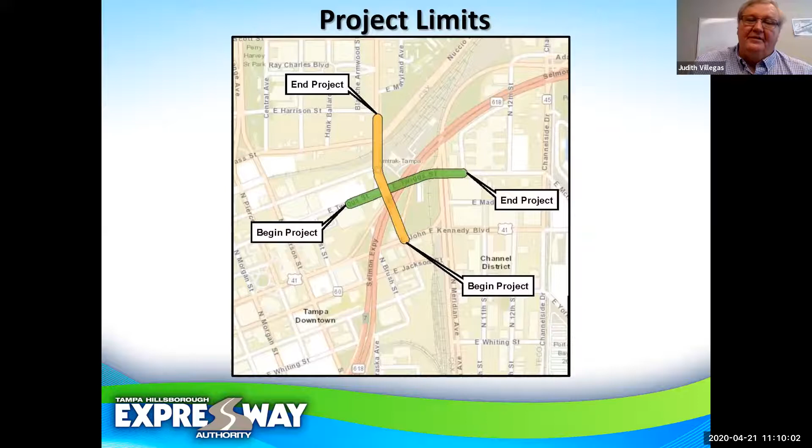The goals of this project: the city of Tampa did a study in this area because of some of the traffic operational and safety problems. So we're looking to improve the safety and the operational efficiency within this corridor. We want to minimize the inconvenience to the traveling public.

The major part of this project is adding an additional lane on Twiggs in the westbound direction, so we'll have a third westbound lane. This is going to improve the traffic flow. We want to make sure that we minimize the number of traffic control plan phases. We have a couple of major facilities adjacent to the projects, which we'll talk about later. We need to maintain direct access to all the adjacent properties at all times.

We need to coordinate with any adjacent construction projects or maintaining agencies. We've got the city, the DOT, and CSX that will come into play. And we want to make sure we minimize the inconvenience to the adjacent railroad station on the north side of Twiggs and the charter school on the south side of Twiggs.

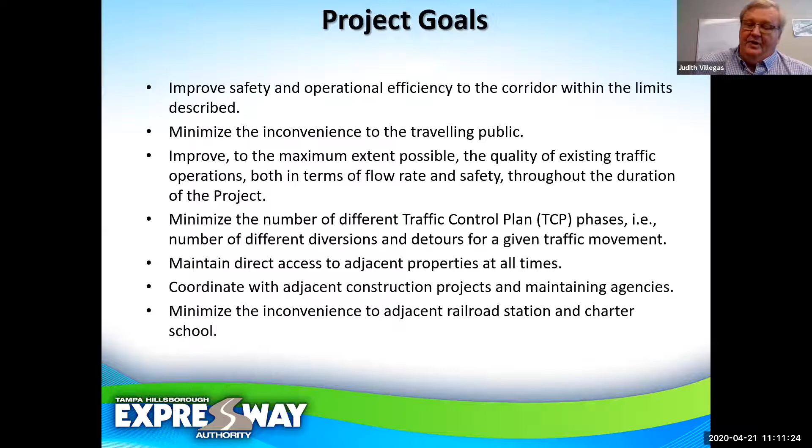Here's a look at the project, the roadway plans. As you can see, the roadway construction aspects are from Nebraska east. We'll be widening to the north side of the road. We'll have to do some adjustments to some drainage inlets to tie into the existing storm sewer system.

You'll see that we'll make adjustments tying into the two driveways located there on the east end of this sheet. Also, you'll notice right at the east end of this sheet that we're closing off one of the driveways into Union Station.

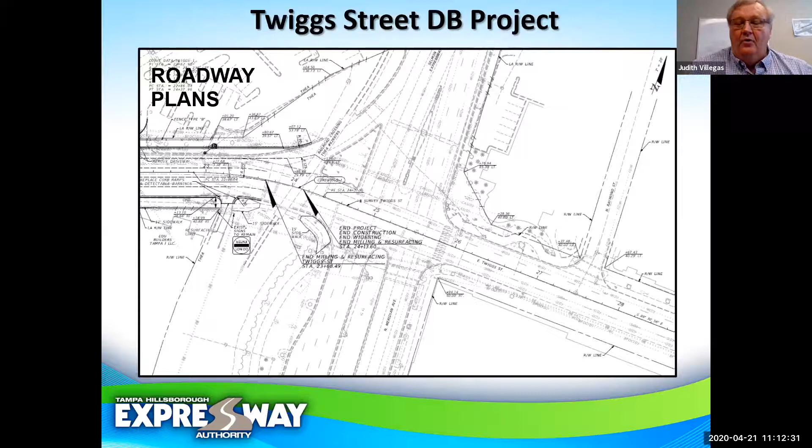You'll see on this next sheet the actions we're taking so that will improve the traffic operation along Twiggs. As you can see, we're stopping the curb work and sidewalk work before we get to the railroad tracks. I want to point out one important item: in working with the City of Tampa, we made some adjustments to where the sidewalks will be located, so they're not all adjacent to the curb as in normal situations.

On the north side, we'll be constructing a 15-foot sidewalk that will tie into Union Station. We will not continue a sidewalk along the north side of the road, as there is no pedestrian crossing at Meridian, because that's the end of our reversible express lanes. We want to direct all pedestrians to the south side of Twiggs to cross Meridian there, where we have crosswalk signals, etc. On the south side of Twiggs, the sidewalk will actually be off the curb and behind the bridge piers from Nebraska east to the westerly entrance to the school.

Then it will transition, and that area is within THEA right-of-way. It will transition up to adjacent to the back of curb in front of the school, but still a wider sidewalk all the way, with no grass strip—sidewalk from the back of curb to just inside the right-of-way line. That wider sidewalk will then tie into the existing sidewalks on each side of the railroad tracks.

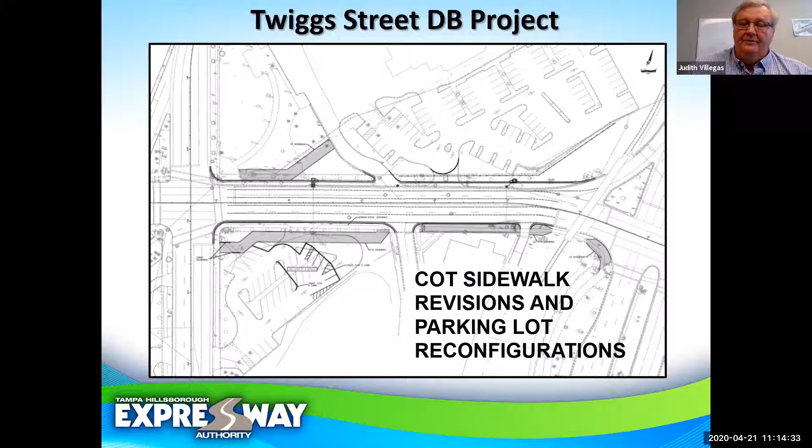For our traffic control plans, there will be no lane closures allowed along Twiggs between 6 and 9 a.m., and also between 2 and 7 p.m. Those longer afternoon hours are due to the school letting out. This applies Monday through Friday. On weekends, longer closure hours will be allowed, and we'll work with the contractor, potentially on non-school days, to adjust that afternoon closure to allow more work hours.

Any work at night, we need to make sure we minimize noise impacts because we do have residents to the east of the project along Meridian. As I mentioned earlier, there's coordination needed with the school and Union Station.

Public involvement for TCP—the design build team will need to constantly be providing information to THEA's communications team so they can get information out to the public on THEA's website for any lane closures or other major work efforts.

A major item as part of this project is we have a joint project agreement between THEA and the Florida Department of Transportation. Part of the project is also putting in new signals at Nebraska and Twiggs. The DOT is funding that as a project they had, and THEA is constructing it as part of this project. Part of that joint project agreement between THEA and DOT is you will need to have a DOT railroad clearance letter prior to beginning construction.

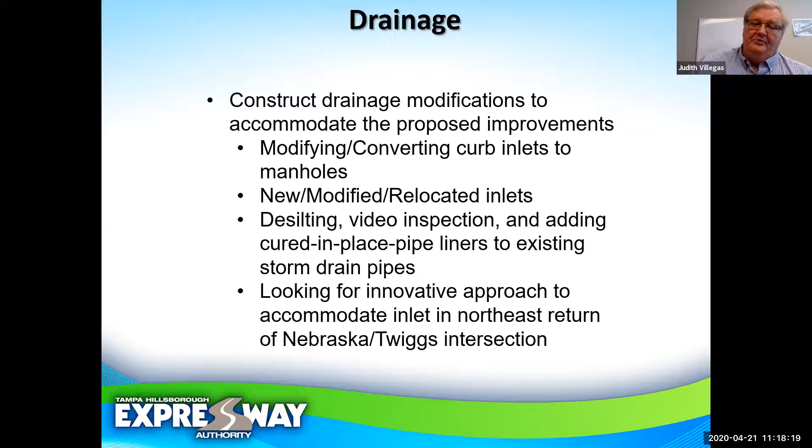As mentioned, we're replacing the existing signals on span wires with mast arm supports. We have a conceptual roadway design as part of the RFP package, along with a conceptual signalization design with mast arm locations in the northeast and southwest corners of the intersection. We've already done utility clearance and SUE work in those locations to avoid conflicts with those mast arms. We also obtained an approved design variation for diagonal mast arms on the project, which has already been signed off by DOT.

Included with the signals is updating the pedestrian signals, and there are a lot of ITS communications for the signals with the City of Tampa and other agencies. All that work will be included within the project.

Sign structures and lighting. Part of the study by the city recommended constructing overhead signs to restrict westbound Twiggs Street traffic from turning left onto Nebraska between 7 a.m. and 9 a.m. This will allow more east-west flow along Twiggs. Overhead signs will need to be placed, and we're looking for the design build team to come up with a design for where to locate and construct the proper signage to restrict the left turns at that intersection.

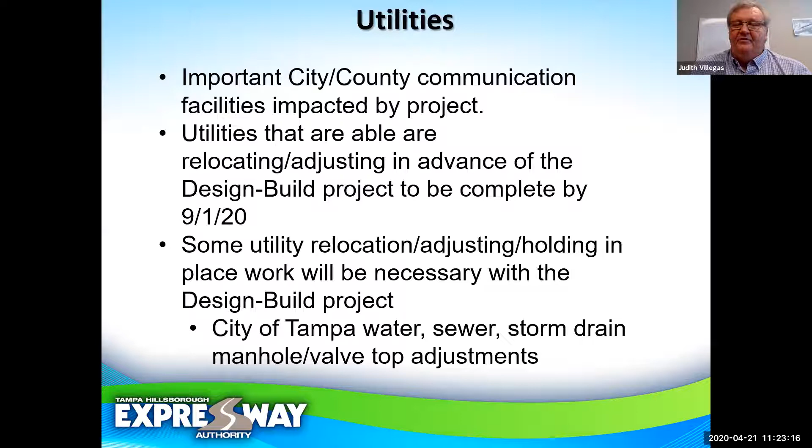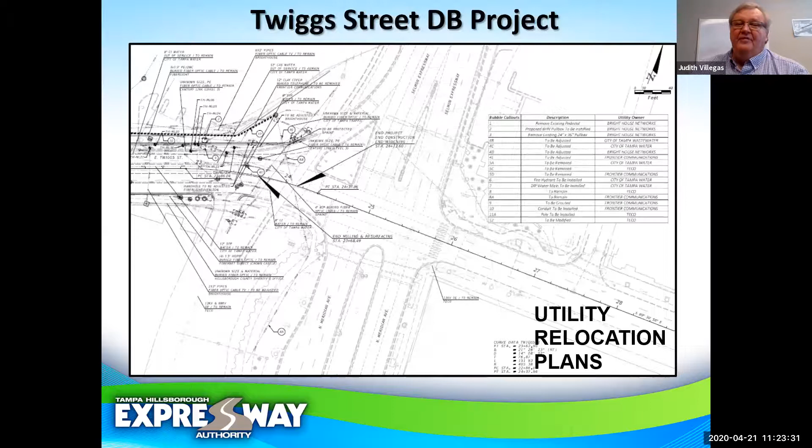We prepared utility relocation plans. These will be provided to you, showing all the SUE work and locates we've done, and that information will be provided to the design build teams.

Design variations or exceptions: it will be the responsibility of the design build team to obtain and/or modify any applicable variations or exceptions. As mentioned, we already have an approved variation for the diagonal mast arm orientation. We will also need the design build team to look at the lateral offset for all existing bridge piers along Twiggs. They will need to verify that the existing columns meet the 600 kip vehicular collision force requirements, and retrofit if possible; if retrofitting isn't possible, they'll need to prepare a design variation exception for that situation. This shall be a structural element during the design phase and potentially during construction that the design build team will need to address.

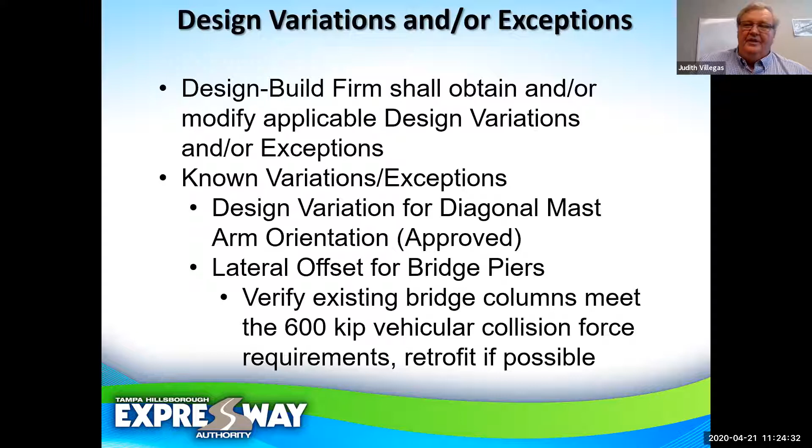Public involvement, as I mentioned, THEA will handle with their staff, in-house and consultant. They'll be sending out weekly notices for lane closures, bi-weekly update emails, maintaining the project website, and posting updates on social media.

We'll need the design build team to closely coordinate with THEA staff. We may need them to attend public meetings if that comes up, and provide responses to the PIO to address issues as they happen. We'll also request that the design build team proactively report any public contact on the project site to THEA so we can address those issues and provide any other support needed. But the main public involvement effort will be handled by THEA staff. We'll only need support for potential displays and graphics from the design build team.

For the written technical proposal, the design build teams will need to submit one original, 7 flash drives with the proposal in PDF format, and 7 collated complete sets of hard copies of the proposal and plans. You can see the requirements there.

The project approach is a maximum of 10 pages, and should include a schedule narrative for design and construction with bar charts. The critical path for the project shall show no work at risk. The schedule shall show what it will take to do the project. Plan sheets shall be 11 by 17, and the TSPs shall be submitted along with the written technical proposal.

As part of the price proposal, because there's a JPA between THEA and DOT, the signal replacement work prices need to be separate from the remaining work. You'll need to submit those two prices, which will total together. We'll also need separate schedule values for the signal replacement work and for the remainder of the project. When you invoice during design and construction, you'll have a separate invoice for the signal replacement work, as that is being funded by FDOT.